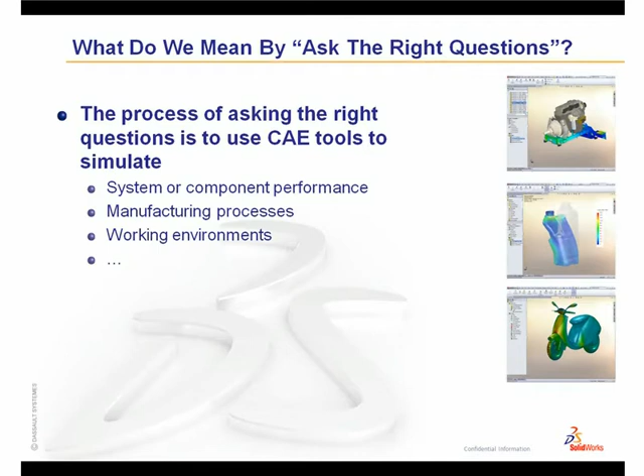Today's designer has many tools at his disposal to ask the right questions. Today we are going to look at how we can use CAE tools to simulate the system or component performance, its manufacturing process or working environments, all of which will have an impact on the end user's experience of our products.

So why would I suggest to you that you should be asking the right questions? By asking the right questions, you get information to reduce the risk associated with any design decision. Design is a process, it is a journey. As we're going through this process, we are continually making design decisions.

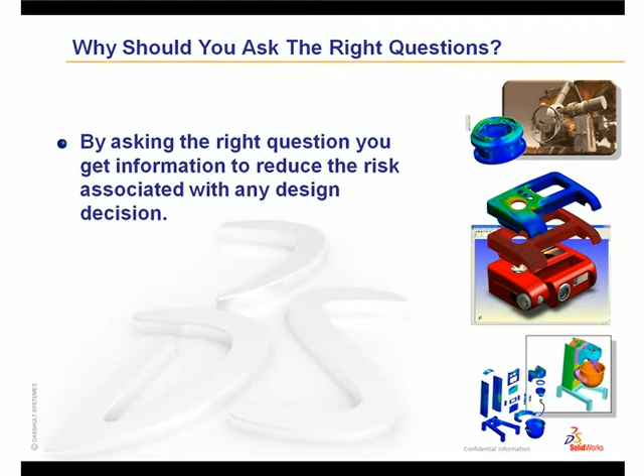How thick should this plastic part be? What gauge of material should we use? Do we use steel, aluminium, or another material? Asking the right questions is all about getting information, and information is key to getting better products.

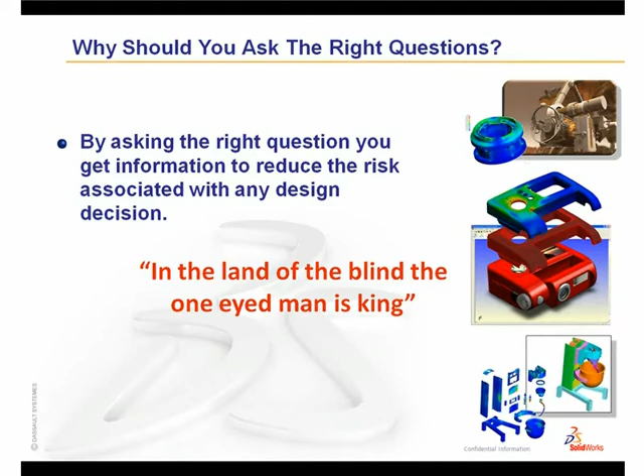So what might be the right question to ask of any product? An obvious question to ask is possibly, why do people buy this product? The secondary question to this is very important. And again, if you can decide why people buy your product, can you then quantify this desirable quality?

Can you measure it? Can you improve it? Because obviously if you can improve it, it then makes your product more desirable to the paying public and you're going to sell more product.

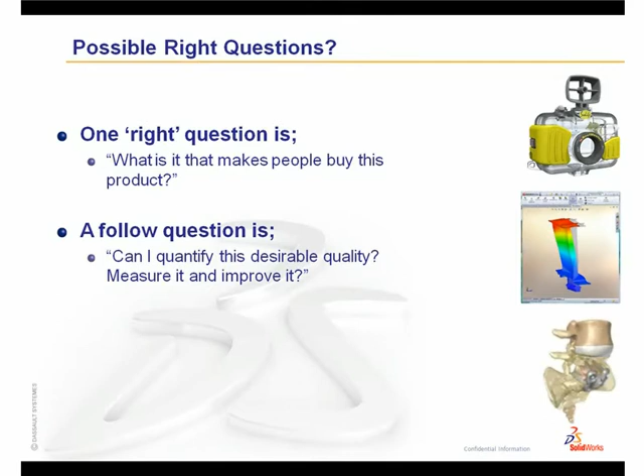So we have decided we're going to ask questions of our product. When do we ask these questions? We want to ask these questions, carry out these simulations as early as possible in the design process. We can change things without too much impact on everyone else.

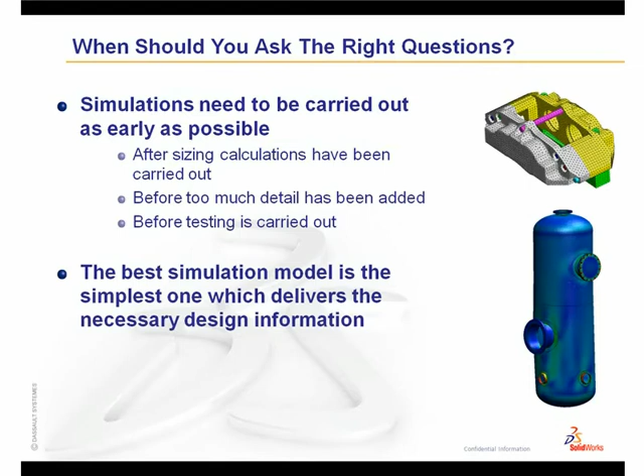It's much better to find out after a week that your proposed design won't work rather than waiting 6 months. The best simulation model is the simplest one, which gives you the necessary design information. Don't wait for the design to be finalized. Early is better when asking questions.

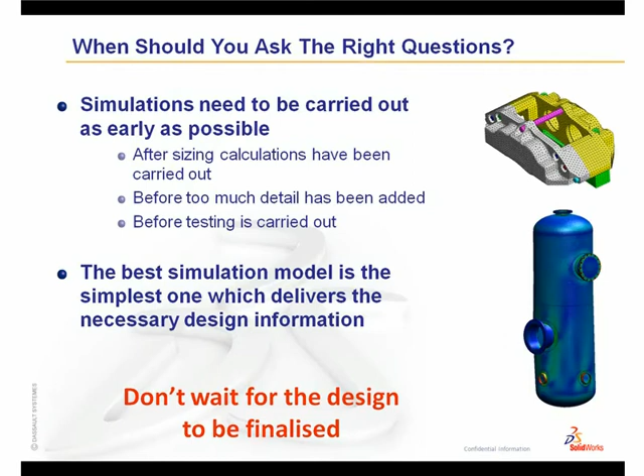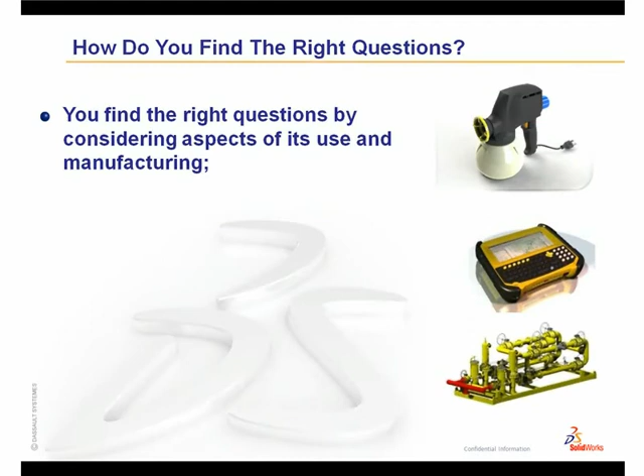So, how do we go about finding the right questions? You find the questions by considering various aspects of its use and manufacturing. And it can depend not only upon how it's going to be used, but also how it will look.

So things might be, how critical is the component fit? For a mobile phone, this might be very critical, but for some industrial frameworking, it might not be so critical. Will the manufacturing process lock in loads? The items have to be transported from the factory to the end user.

How is that going to happen? Where will it be used? How will it be used? And what ways could it be abused? There are many other considerations you might think of depending upon the product.

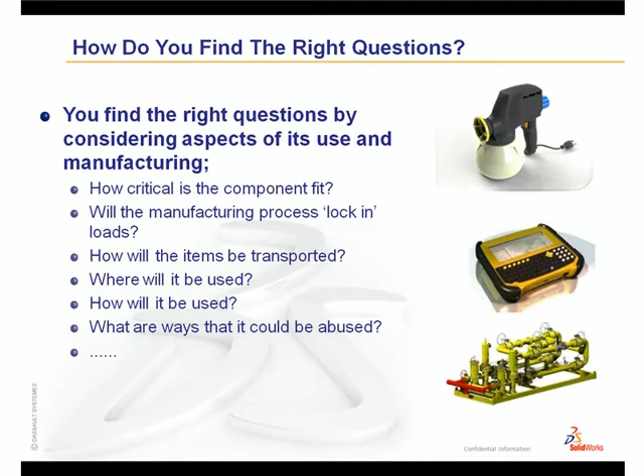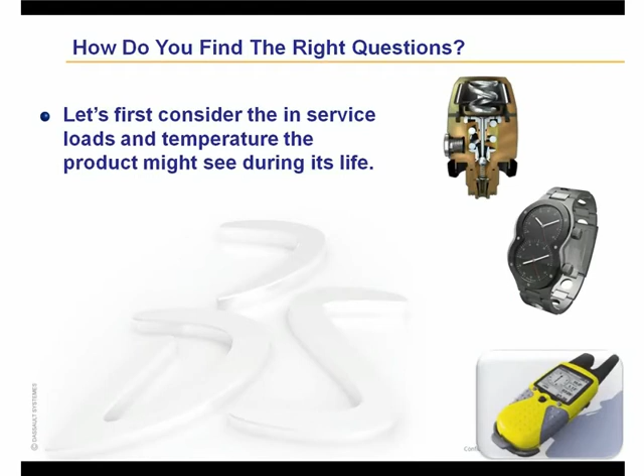So let's look in a little bit more detail. First, we're going to consider the in-service loads and maybe the temperatures the product might see in its lifetime. Questions about how heavy it is could also impinge upon the loads it's seeing. Does it get hot during running?

How much load does it have to withstand? Are the loads constant or varying? This is a very important consideration because a varying load will obviously have an impact on its fatigue lifetime or indeed any dynamic effects you might want to consider.

The residual stresses due to either overload during its service life or the manufacturing process are important considerations. And again, the transport loads. Depending upon the product, you should be able to create a finite list of the in-service loads and temperatures your product might see.

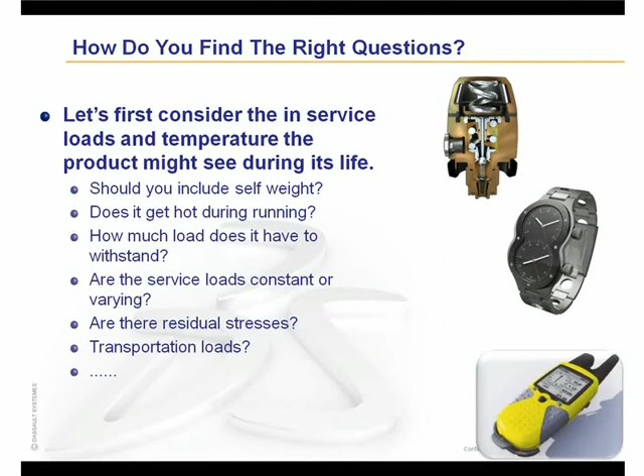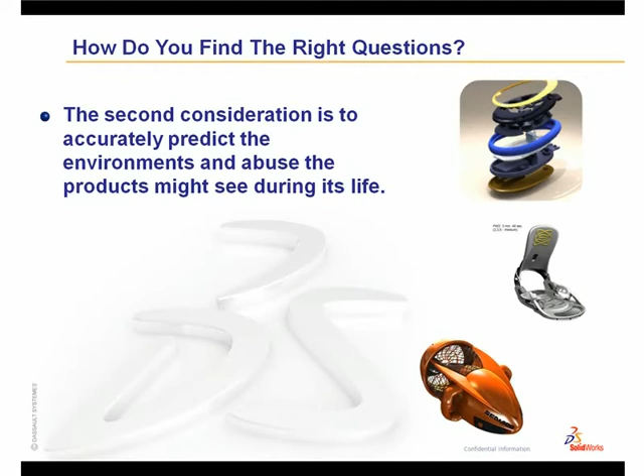The second consideration is very, very important because we really have to start to think about not only will the loads the product will see during its lifetime, but what environment will it see and what abuse might it see during its lifetime.

So we might have to think, where is it going to be used? From the extreme of the Antarctica to the Sahara or the rainforest. Is it going to be hot and dry? Is it going to be moist and wet? Humidity? Cold? All these things will have an impact on how your product will be used and how it might be abused.

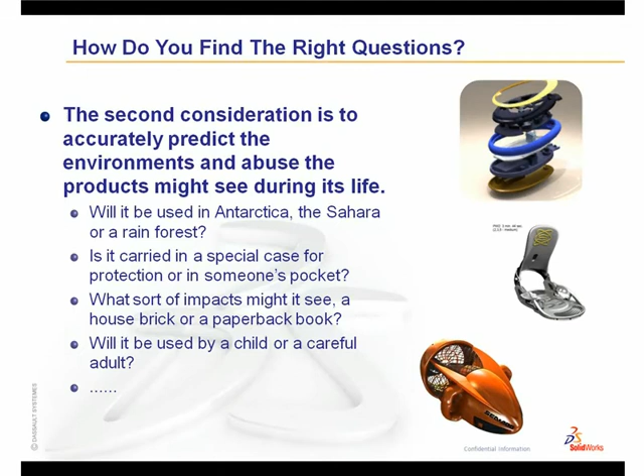Is it going to be carried in a special case or someone's pocket? What impacts might it see in its life? Could a house brick fall on it, or is it going to be a paperback book? And most importantly, who are you selling this to? Is it going to be used by a child or a careful adult?

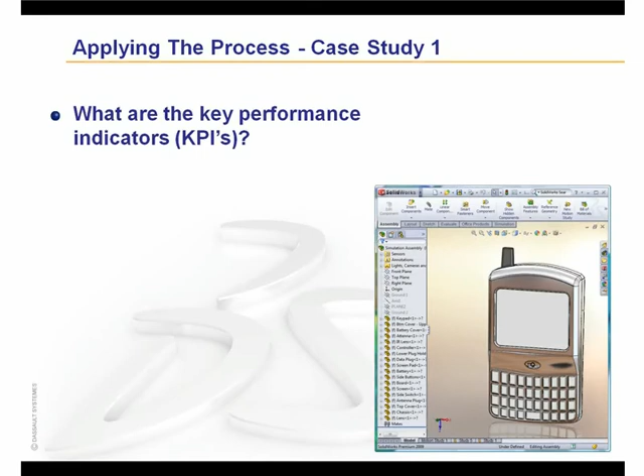So we're going to take these considerations and apply it to a simple handheld device. The first thing we're going to consider are the key performance indicators for this product. Or put it another way, why do people buy this product? Is it the ease of use, the completeness of the features, the cost, its weight, the styling?

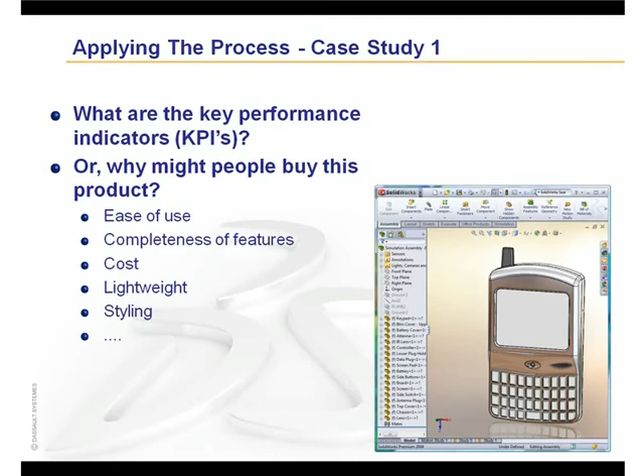Depending upon the product, this list can be never ending. But once we have this list, can we then turn these key performance indicators into quantifiable items that we want to measure and improve? We can then look at how the product might be used and where it might be used, again splitting it up into load considerations and environmental considerations.

So once more, load can be heat and cold temperatures. For a handheld device, obviously drops and impacts are very important. Is it going to be used very carefully with only hand or finger loads? Or is somebody going to stand on it by mistake or sit on it? Other things with electronics might also be electromagnetic interference.

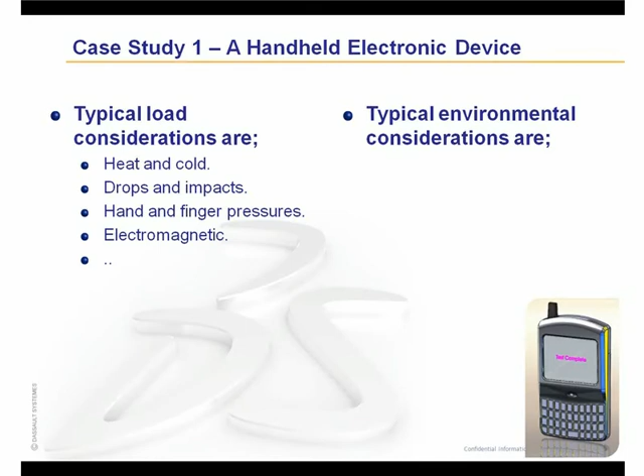Now moving on to the environmental considerations. In this I've actually included a manufacturing consideration. The multiple plastic parts have to fit together to make sure the styling is correct. But true environmental considerations might be, where is this going to be used?

Does it have to be waterproof, water resistant? Dusty or sandy locations, we want to make sure that the dust and sand doesn't get into the product. Is it going to be used for a long time at elevated temperatures? Typically, electronic components don't like that kind of behavior.

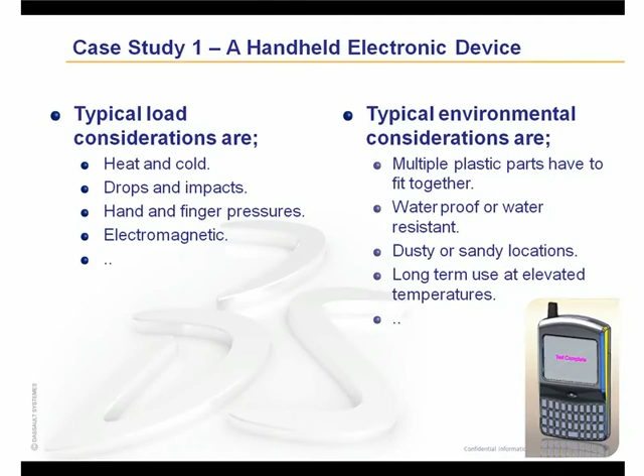So once we have these considerations, what we then want to do is convert them into simulations that our CAE tools can carry out. So we're going to convert the environmental working challenges into different types of simulation. So when we think about the multiple plastic parts coming together, we can consider fit, maybe do a tolerance analysis.

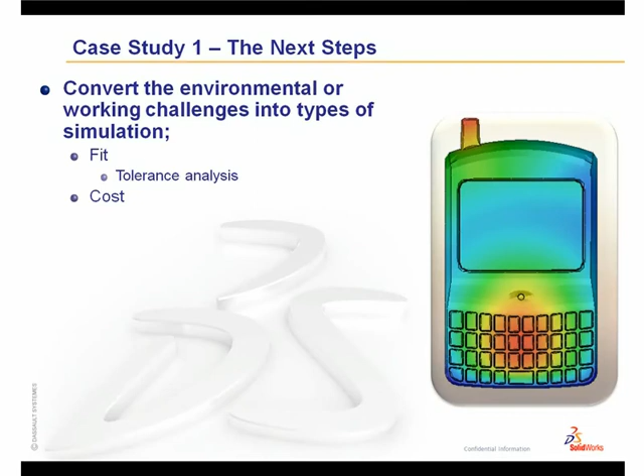One of the KPIs we might consider for a handheld device is the cost. A big impactor on the cost of the product is its material content. So maybe you want to do an optimization of the material. Now this optimization might be choosing material A over material B, or indeed it might be reducing the amount of material without sacrificing the strength of the product.

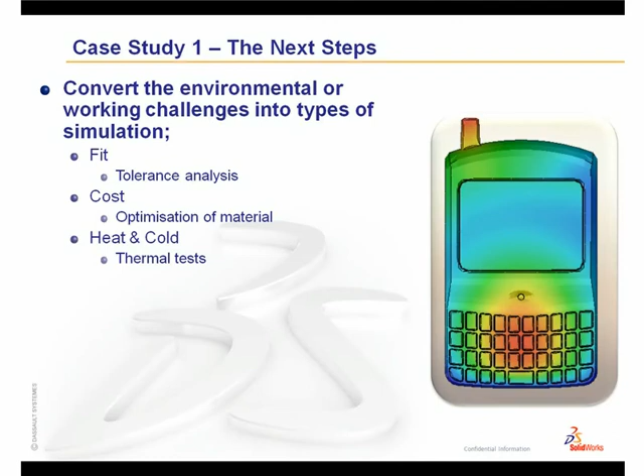So considering the actual use cases, heat and cold, obviously that can be done by thermal testing. Dropping or impacts, now these require some sort of dynamic testing. Waterproof and water resistant, simple pressure loads, pressure tests.

The dusty or sandy locations, again this is a little bit more complicated, but what we want to do here is do an in-use test of loading and abuse to make sure that during this process we have an adequate seal contact pressure throughout the entire working environment.

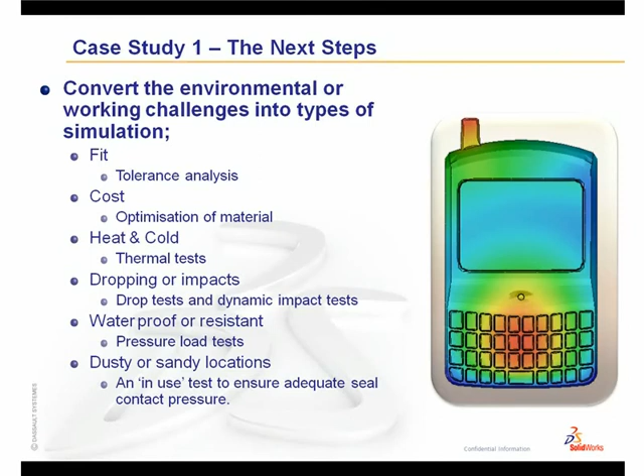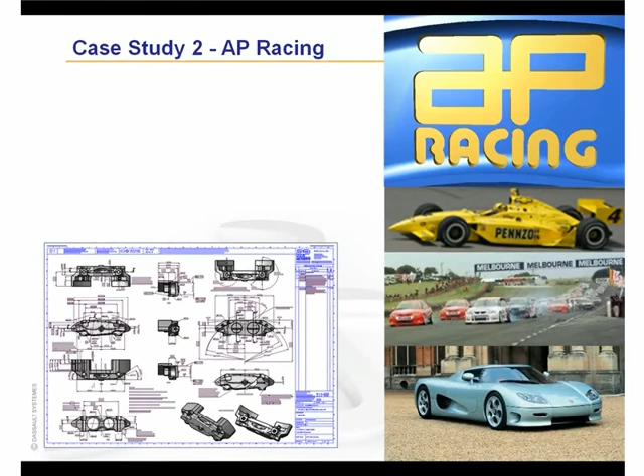So let's look at another case study. What we're going to do here is we're going to talk about a company called AP Racing. AP Racing live in the rarefied world of high performance automotive manufacturing. They are one of the world's most successful Formula One suppliers of brakes and clutches, but they also deal in other forms of motorsport and high performance cars.

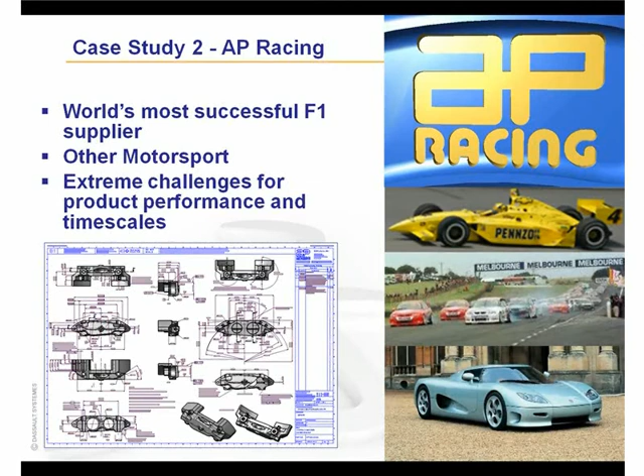But it's not so much what they do that makes AP Racing such a good example. It's how they go about what they do. So again, we're going to look at just one of their products, the brake caliper. So the first thing they do is they consider what makes a good brake caliper. They want to identify the key performance indicators. Now, two of these key performance indicators can be measured by simulation.

Basically what they want to do is they want to measure the stiffness of the caliper against its weight. Okay, the stiffer it is, the better it is at braking, but they also want to make sure that the material maximum stress doesn't go too high, resulting in failure.

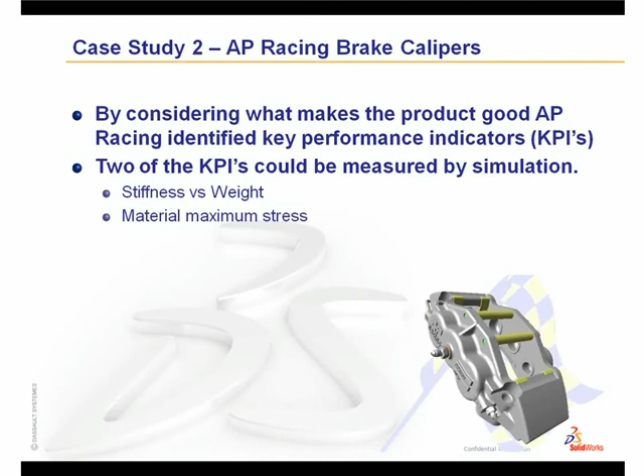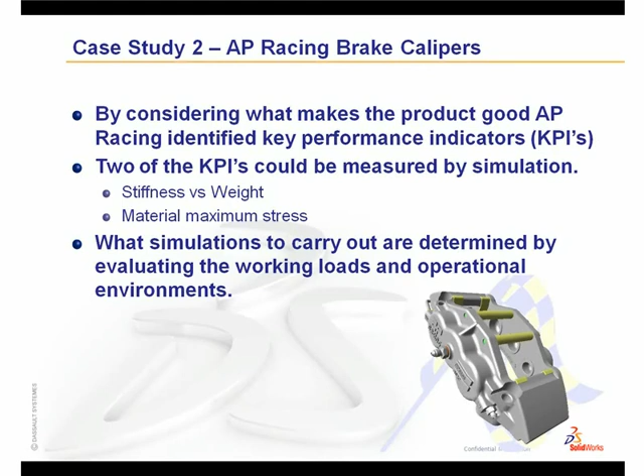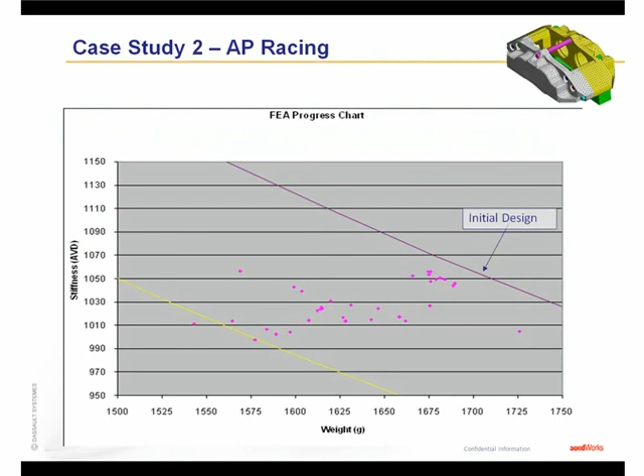So once they've got these KPIs, they will use the environmental information and working loads to decide what type of simulations they have to carry out. So here's a graph from one of their design cycles. On the upper right, we have the performance curve of their existing design, of its stiffness against weight.

On the bottom left, we have the design goal. This is very important. Not only have they actually quantified what they want to measure and what they want to improve, but very sensibly they have decided in advance at what point will they stop the design process and actually manufacture something.

So when we look at the brake caliper, we can see there are different ways to actually reach this design goal. Firstly, we can just reduce the weight and keep it at equal stiffness. We could keep the weight the same and increase its stiffness. But best of all, we want to reduce the weight and increase the stiffness.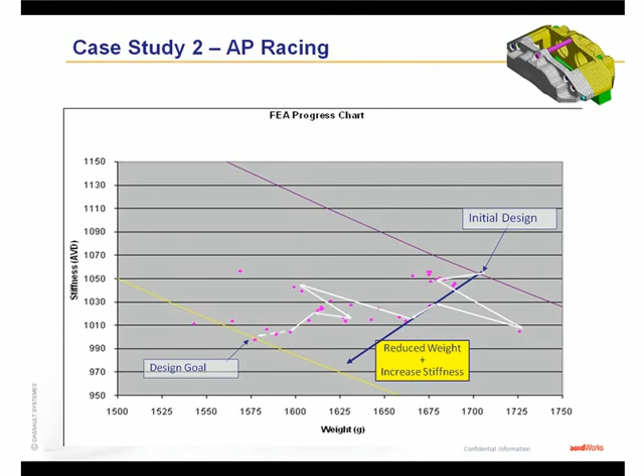Now the pink dots on there are the points in which they carried out these design processes. As you can see here, it's not a linear process. Many design iterations went through before they reached their design goal. If you think about it, there's just no way you can actually physically prototype this number of tests.

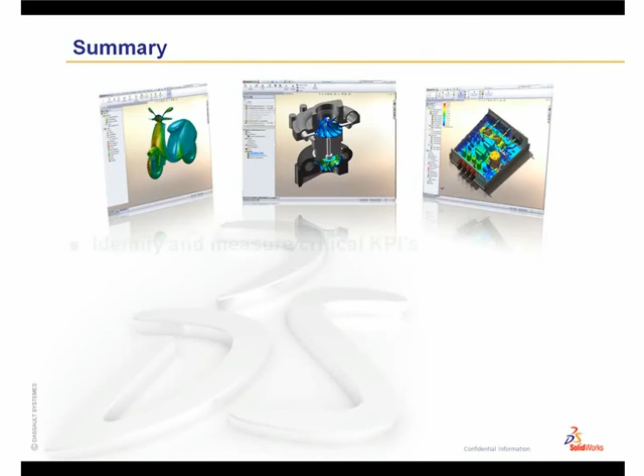In summary, when we think about asking the right questions of our products, the first step is to identify and measure your product's critical KPIs. With this identification and measurement in place, you now have a purpose for your simulations.

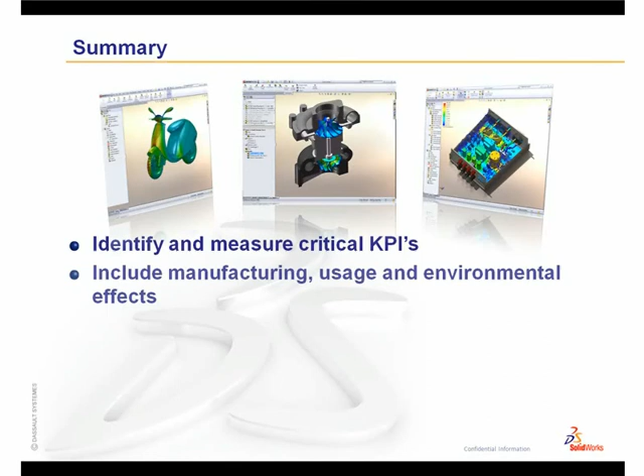Remember to include manufacturing, usage and environmental effects in your simulations. By asking questions early on in the design phase, you will reap the greatest benefits. But remember, it is very important to set a clear and defined goal of your simulation. How much do you want to improve your critical KPIs?

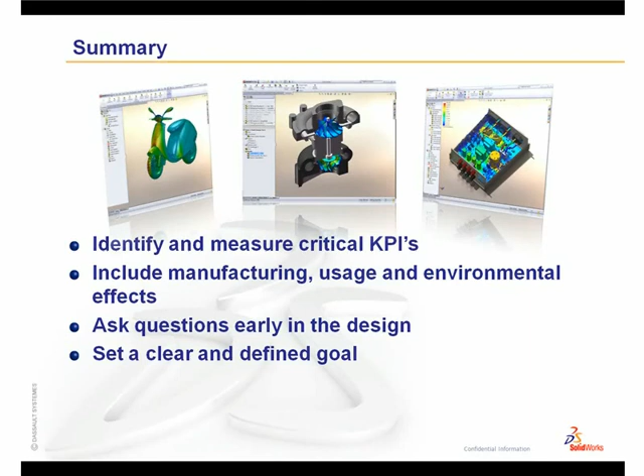I hope you'll agree with me. Simulation isn't rocket science. It just takes a little bit of preparation. Thank you very much for your time. I hope you found this instructive.